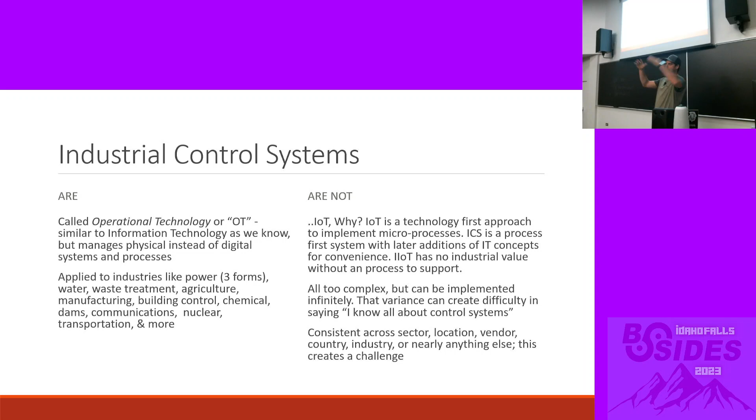Very general statement. We'll start high and then get into the weeds. Industrial control systems, they're all around us. They make the world work. We refer to them more often as OT. It's a combination of both IT and the actual physical systems to make these things work. Operational technology, in this instance, is systems and processes, the same way IT is made up of systems and processes to make all of our computers and networks and databases and the millions of other things they do work. OT is applied to something where the process and output is not virtual, but more so physical, and they have a physical aspect to them.

There's a bunch of industries that it works within. I won't list them all, but you can guess the stuff that makes our life comfortable and cush is run by these OT systems. But they're not IoT. Something I get asked actually more often than I think. IIoT, for anybody that's going to want to bring that up, is IoT applied to industrial control systems, but if you take the system, like the actual plant or process, out of that, they are just IoT, so I would not consider them on their own an industrial control system. They're kind of a control system, and they have some of the aspects we'll talk about today.

Additionally, control systems are complex. Why? Because across sectors, across vendors, across whether it's states, nations, your regulation, how they're made, what software they use, what hardware they use, the understanding of what your limitations are, your safety regulations, all these are different. And because of that, saying you want to secure them is also different.

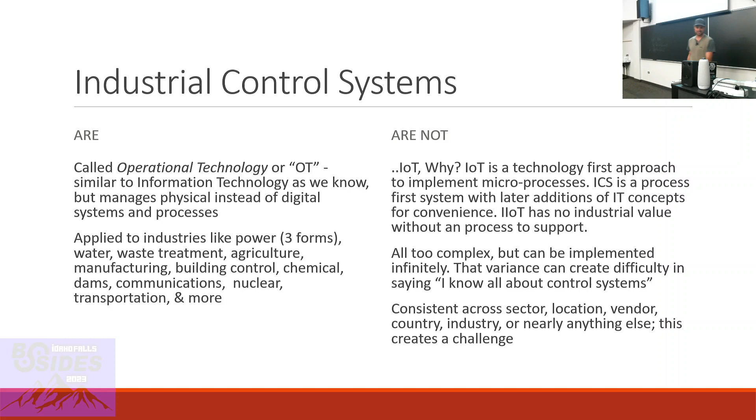I appreciate that. Yeah, inconsistent across sectors, locations, vendors, countries, industries, nearly anything else. This does create a challenge. Appreciate that.

So, this is the only time I'll be talking about hardware. A lot of people, when they talk about OT, they're like, oh, you have PLCs and HMIs. I'm not talking about that. We're going deeper, for better, for worse. But generally speaking, you kind of have a couple of classifications here. PLCs, most people have heard of these. Who has heard of PLCs? Many folks. Look at that. If I had said that like 8 years ago, I wouldn't have even raised my hand, let alone half the people in this room, maybe not. So it's becoming more common.

Realistically, our real-time computers and PLCs are kind of becoming one. They used to be a little bit more separate, but your average PLC put out by a vendor is running an RTOS now. So that's kind of becoming one. Microcontrollers, essentially very pared down computers. They do have a command shell, but they're very limited. They're faster than a PLC. By nature, they're very much pared down. If you want to get even faster, which we'll talk about like process time and loop time, you can go to an FPGA.

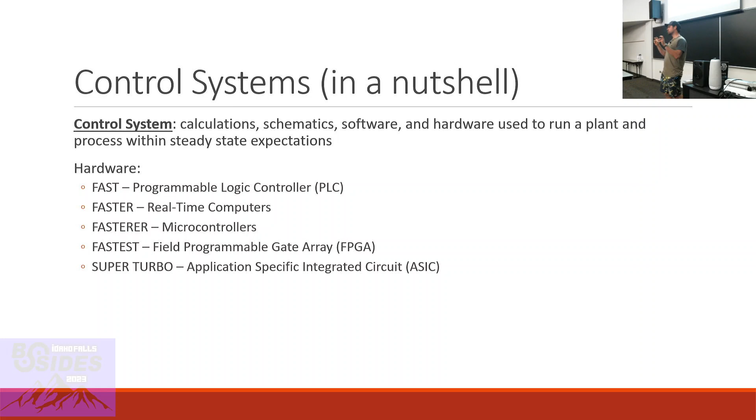It's essentially a piece of hardware that's customizable to have logic arrays, logic blocks, make decisions for you as you see fit. And based on what your input and output are hopefully going to be, you kind of get to choose how this chip reacts. And then the fastest, super turbo, I call it, is an ASIC. Anybody that's ever used like a voice recorder: it takes an analog signal and in nearly real time converts it through a digital codec, creates a digital file, streamlined in real time. That is a chip that is considered probably the fastest way to have a control system reaction. So that is the last of our hardware talk.

And now we'll actually talk a little bit more about control systems and how they're applied. So, classes of control. Most of what we'll talk about today is continuous. This is what most of us would understand as a control system. Continuous, generally speaking, you have infinite granular control over what we call a manipulable. You have a high point and a low point, but within that you have unlimited options of what you can actually adjust. Then you also have the opposite of that, the other most common, which we'll talk about: bang bang. This is essentially a binary output. You kind of have an on or an off.

The best way to compare these is if you use a stove and it is a gas stove, you have a knob, off to max. If you have a flame really small, you can adjust it perfectly to where you want it to get the right temperature. That is what I would call a continuous control. Whereas bang bang would be more of an electric stove. For anybody that doesn't know how electric stoves work, they essentially turn on until they hit what you want them to be, and then they either switch to a smaller coil or they just turn off and then come back on a minute later to retain what they can of that temperature, right?

So we'll go a little bit more into detail on that, but two that I figured were worth mentioning are model predictive. So this is used, I'd say, mostly in modeling and scientific purposes, I'd say not in a physical realm. This is essentially saying I want to build a control system. I want to do the math to calculate what will happen. I want to have inputs, outputs, essentially writing a computer program, but doing some form of simulation to see if I can prove my control system will react how I wish.

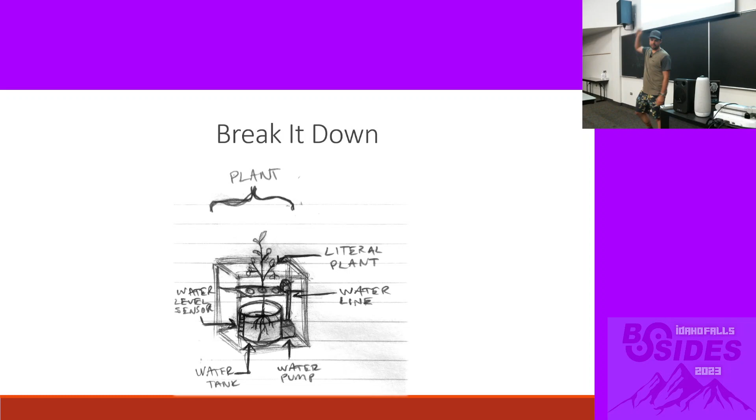So this is our plant. Literally there's a plant, but also we'll figure that we actually call this a plant. So this will kind of be my reference point. This is by far the most simple version of what I could consider a control system, if not like a light switch, but what we would kind of formally refer to as a control system. I'll come back and reference this a bit.

So in this, we have a water level sensor, a water pump, a water tank, there's a little plant. It's a hydroponic system, so it's growing. The roots have overgrown into the water, neither here nor there. And then there's a little water line that pushes water up into a watering tray. Very, very simple, right? But the plant itself is a physical space in which your processes can function.

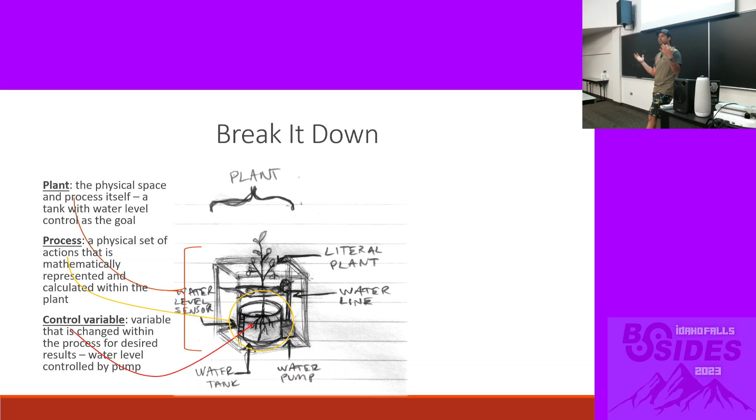Some plants have one process. Most plants have dozens of processes within one plant. But the plant is a physical space, whereas processes are, I'd say, virtual, if not a mathematically representable thing going on. So a control system has many processes, many plants with processes within them, one-to-many relationship. In this case, every process should have a control variable. In our instance, what I'll refer back to is the water level of this tank. We'll say that it is at 4 inches. It's measured at 4 inches, and we want it to be at 3 inches. We'll go a little bit deeper into that.

Every process, at least if we're using something that is a closed loop, which we'll talk more about, will have a feedback option. In this case, that is provided by our water level sensor. It can tell us where we're at, so we understand where the status of our process is as an output, used for modulation. We have a reference, which in our case, we also refer to as a set point, but it is what we wish our actual control variable was at. Like I said, we wish it was at 3, we want it at 3 for some reason.

Usually your reference is provided by scientists, subject matter experts, engineers, people who understand their topic very well. If you're working in a plant where you're mixing chemicals, you probably have a chem engineer, and they're going to say, well, you should have exactly this amount parts per million mixed at this rate with this temperature, many things going on, and they can tell you why. But as a process engineer, your job is to get to that actual reference point, because the people who know what it means told you to.

And then finally, a manipulable. So a manipulable is the actual physical thing we can put power into or take power away from to control what's actually happening and potentially modify. Again, get our control variable as close to reference as possible. In this case, it's a water pump. So very, very simple system. For what it's worth, any industrial control systems you might be imagining are this times, we'll say, anything from 10 to 100 as far as complexity. So we only have one thing to control here.

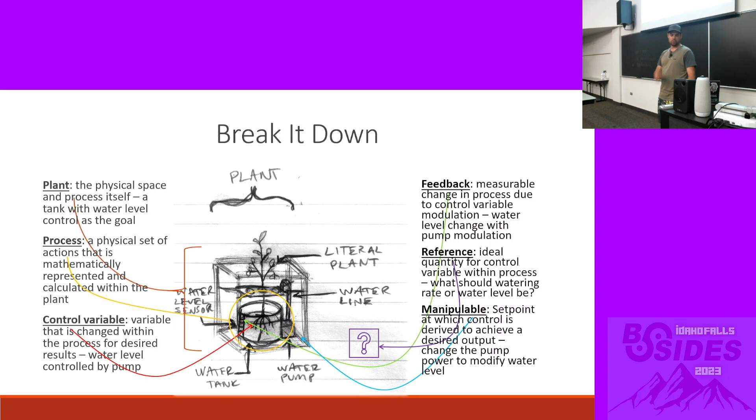But I mentioned set points, and I mentioned that there are larger control systems in the world, so I'll give you a couple examples just to give a reference of how this would apply in the real world. So you can imagine power transmission. In this case, we'll say line voltage would matter.

So if you had power going through a line and a squirrel touched it incorrectly, or it touched a tree, or something fell on it, and you're measuring through feedback what your line voltage is and it goes to 0, the smart thing to do would be to open a relay somewhere, cut power to that line, protect from a fire or an arcing or something like that for the safety of your system and also the safety of anybody in proximity to that system.

Water treatment. This is something that anybody that's been following cybersecurity for industrial control systems in the last couple of years would know. Oldsmar had an incident where chemicals, parts per million, were being modified in the plant illicitly. You don't want to have too much or too little of any given particulates in your water, right?

That's how I work. Oh, I lost one. That's good. So this is supposed to say oil and natural gas on the left. Thank you, PowerPoint. Appreciate that.

Making sure your O&G, your fluid, can actually flow as necessary.

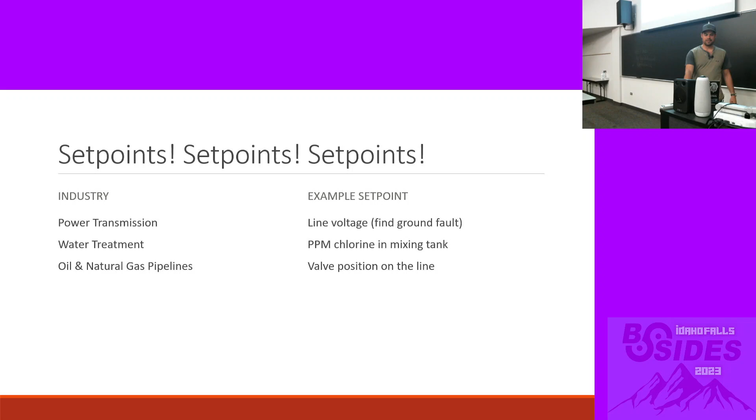Thank you, Microsoft. Medical: anybody that has or knows somebody with a diabetic condition, if you have an insulin monitor, it's quite important to monitor your blood sugar level and have something, an insulin pump, modifying your blood sugar level accordingly. And then building control, the fact that this room is at a comfortable position.

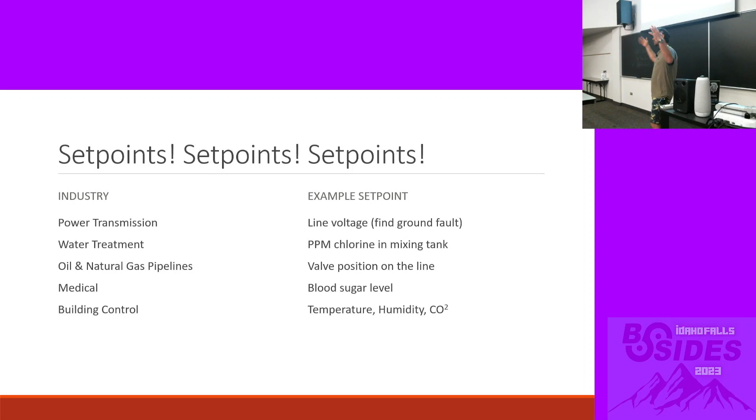I don't know if you guys are too warm or too cold, but we're looking at the temperature, adjusting accordingly so we're not freezing or sweating. In industrial instances, you might be worried about what your humidity is, what your CO2 levels are. In a home, you probably care about that as well. But there you go. That's a couple examples.

And I will take a second because I've been ranting while I drink water. Does anybody have questions? Yes. That means I'm explaining so perfectly that nobody has anything left. Oh, I'm sorry. My apologies.

That's a great question. I would say it's up to, are you building your own process or are you building for somebody else? I'll answer your question with a question. Because if you're at home, say you want to build something to feed your cat. How much should your cat eat every day? You can measure the weight of the bowl.

And you say it should have 5 ounces of food at 6 a.m. every morning. And you take whatever the current weight is, minus 5 ounces, invert it, and then pretty much dump food until, depending on how you apply it, right? There are practical, obvious times where sure, this is what my set point should be. But realistically, it does take a bit of a team.

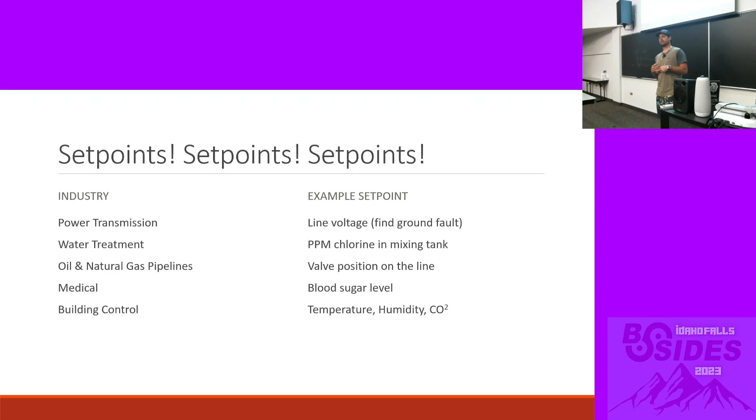You have to have one of those smart people that can tell you, well, my line voltage should never exceed this many kilovolts. Or if we're trying to do load balancing, realistically, power engineering is all about balancing. It's a nightmare. So it's never actually at ideal. But you might have to have an environmental engineer to understand, and we'll talk about this a little bit when we get to noise and disturbances.

Yeah, so it's all about the complexity of your system. If you want to build something at home, congratulations, you're a subject matter expert. If you're trying to get something a little bit more complex, you're gonna have to call a couple friends and perhaps do some homework, get somebody who knows differential equations on your side, because that's just the way it goes with tuning and whatnot.

I appreciate your question. Any other questions? I apologize for missing your hand.

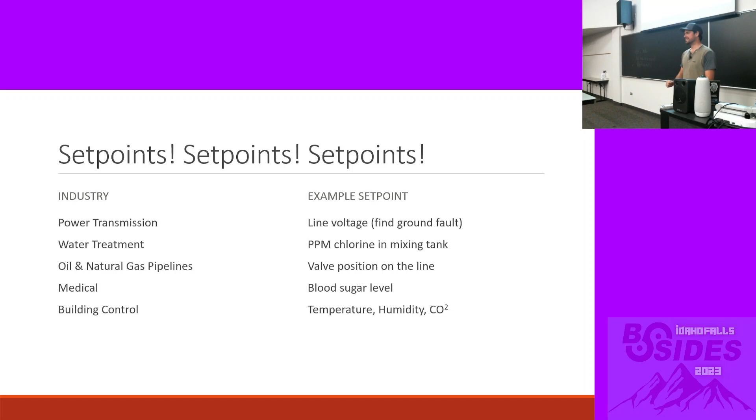Cool. All right, basics were basic. We've made it this far. We'll go to a couple more advanced applications. Not advanced, but how do you actually use this, right? What does it matter? Because we've talked about something super simple. We'll talk about loops. We'll talk about feedback and feed forward. We'll also cover 3 things that make those first 2 necessary, and then PID tuning. So these are the, after understanding the basic terms.

Disturbances, as we just said we cover. Disturbances are inherent, we'll say, principles or facts about your process that you don't necessarily get to control, but you can observe. If not, you are putting in control to get around your disturbances. So, for the purpose of our example here, the water might pump up to your tray there, but it can't really control how quickly it pumps down.

Or if we're doing an array of pumps, and they're pushing into each other, you can say maybe, well, I can control the rate at which water leaves my tank here and goes to the next one, but I can't control how quickly it's coming in, or if water is sloshing, evaporating, something like that. There are instances of things that will modify what you want to happen, and you're doing your best to work against them. Noise, on the other hand, is inevitable, and you kind of just have to work around it.

So noise is introduced by, realistically, poor sensors. So I built this system. It was a little different. I just had to draw something real quick, and that just worked. But I built this system. That is an Adafruit sensor. It costs a whopping $10. If I went down to the water company and said, I will measure your water level, let me get my $10 sensor out, they would laugh at me, and I would laugh at me because I sound silly, right?

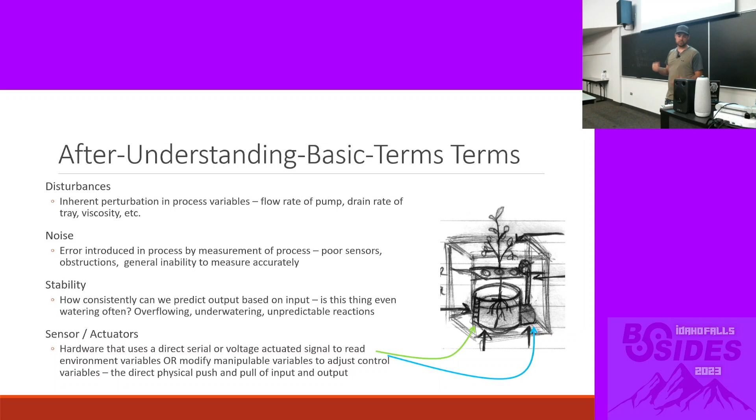And then your sensors and your actuators, these are another fancy way of saying the inputs and outputs. So what can measure how you're doing what you're doing, and what can help you change what is going on to get better, or to further reduce your error, which we'll get to in a second.

Sweet deal. So now we get to discuss loops, arguably the thing that makes control systems work. Both of these are used equally. I would say, if you want, we can talk a little bit about when you would implement each, but open loops are more simple, so we'll start with those. Anybody that codes, again, this is going to be pretty rudimentary, but the logic there is underlying. So an open loop removes much of the nuance of how you control a system. There is no feedback in an open loop. Generally speaking, it is a force control, so you kind of set an input, and then it just goes into perpetuity until something interrupts it.

So pretty straightforward. There are instances where this is nice, like an override or a safety control. Instances where this would make no sense, like on something where I have to know how much water is in it. But the output is independent of the input, lacks reference to it, pretty self-explanatory. Reference input goes to controller, actuating input. There's no loop in this at all. It's a straight line, right?

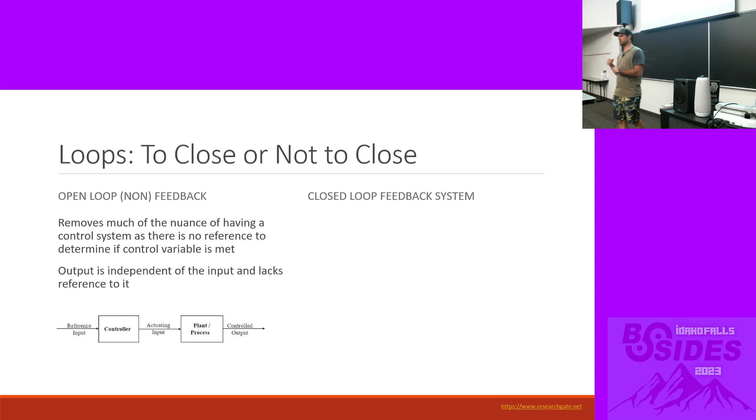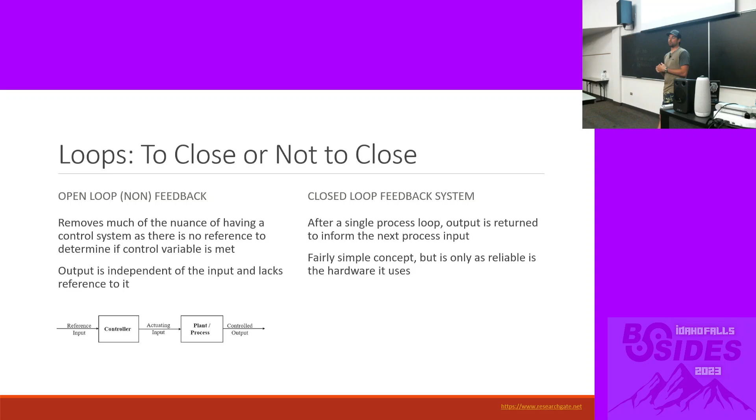So an example of this is a light switch. Turn a light switch on. It doesn't know if the light's on. It just changes state. Maybe it's getting power, but the light switch doesn't know if there's light coming from the actual bulb. On the other hand, a closed loop feedback system has something to measure and provide feedback. So after a single process loop, output is returned via a sensor, and it informs the next process input. And we'll talk a lot about closed loop much more today than open loop.

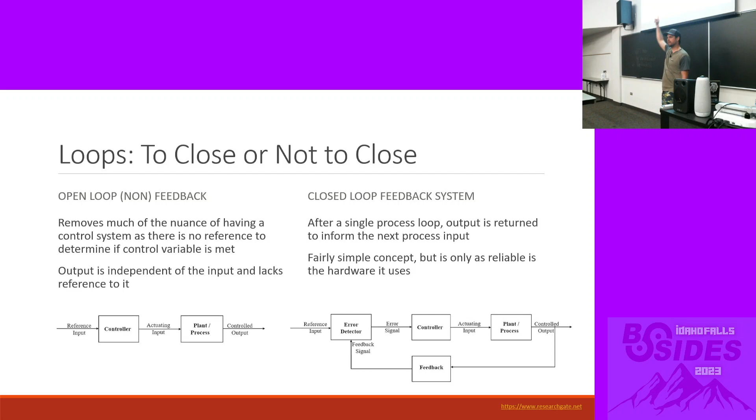And this just runs into perpetuity with the input and the output changing as we go. So, as promised, we'll talk about this a little bit and apply some of the terms that we learned to it. At this point, your reference input, that is what we call the control variable. So this is what we want things to be at. This is our set point. This is me saying, I would like my water to be at 3 inches, please, process system. And this is what I've embedded in my logic to say the feedback hopefully should be at 3.

However, I don't always get that, right? So error is a measurement. It's the difference between your reality, my water is at 4, that is actually in the far right, your output, but we're going to assume for this instance we've already done one loop and I have the feedback saying water level's at 4, what do you want to do about it? I wish it was at 3, so our error is 1. Pretty straightforward. The goal in all processes is to get error to 0. Pretty simple, but sometimes the world gets in the way and there's lots of noise in there.

The actuator is our controller, pretty straightforward. It's also tied to the manipulable. Since they're considered the same thing, we're going to say those are tied logically. And then our control variable output, kind of alluded to this earlier. So this is where we're saying we've measured it at 4. We wish it were at 3 because it's not. We've turned on our actuator via the controller.

Controller essentially, in this case, is me closing a relay that gives power to the pump. If you're writing this in code, like while error not equal to 0, you have to figure out if it's positive or negative. Then you would say close this loop, essentially turning the pump on, pump water until error is 0. And then the sensor reads that and pretty much says, cool, so now we're at 3.7. We've gone down 0.3 inches.

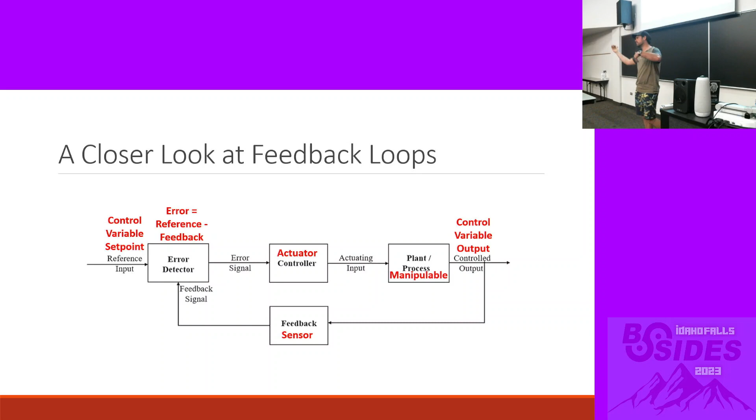Gives that back to our error detection. And so now our error is 0.7 instead of 1. And it does that a couple dozen times a second until it can get from 4 to 3, and our error goes from 1 to 0. So, like I said, fairly simple concept, but these are just putting all the fancy terms on it that would apply to control systems or process engineering.

So, now we'll discuss feedback. Instead of using bullet points or graphs, I'll just tell a story with this one for the sake of getting the concept across. Imagine you're on your way home from vacation and you arrive home. It's been snowing for a week. Well, we all live in the area we live in, so I imagine we all understand this.

And you walk in the house and you say, "Whew, it's cold." And you run over to the thermostat, turn it on, and about an hour is what it takes for your home to warm up, and you go, "Thank you. I can take the 5 jackets and the 3 pairs of socks off and enjoy a cup of cocoa. Good for me." If I had to say you're using feedback, does that kind of make sense? You come to a place, you measure too cold, you turn on a heater until it's not too cold. Pretty straightforward logic.

How would you go about solving this issue better, right? If our reaction time is an hour, kind of not great. So we'll flip it and say you're driving home, you're about an hour from the house, and you say, "Well, it's been snowing all week, and I'm pretty sure the house is too cold." So you log into whatever your smart thermostat app is. Hopefully you have that on a guest network or something that is not on the rest of your LAN. Security people, please implement security in your network.

And you say, "Cool, turn on the heater because I don't want to come home to a cold house." And then your thermostat plugs away, you get home, and you're like, "Oh, look at this, my house is nice and toasty. I don't have to wear 3 jackets. I don't have to have 3 pairs of socks on. Get to enjoy my cocoa and read a book." This is what we would call feed forward.

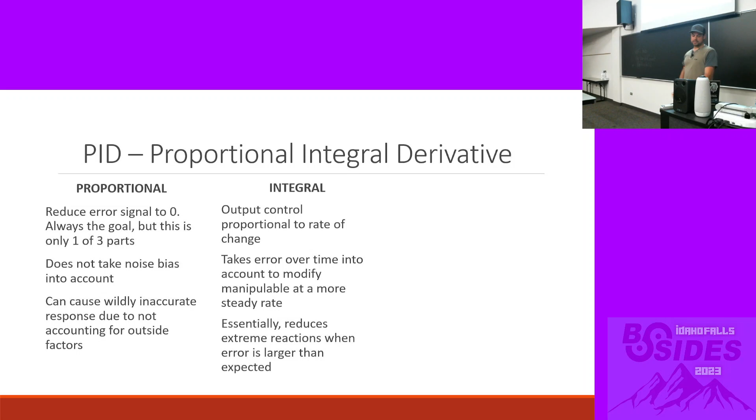Derivative. Anybody here that likes doing lots of math, this is a double derivative. You're not only taking error, binning it, then looking at it over time, averaging your time response; it compares your errors from time step to time step, and almost uses that as a prediction to go against significant actions, or rather only make significant actions when there is a notable change.

Trying to think, yeah, I figure that's worded pretty well. D prevents correction, overcorrection over time after P and I have been established, and it's acceleration and deceleration control. So it's a bit more predictive. For instance, if I have a pump that is pumping too heavily, it'll kind of take that into account and say, I know the sensor's reading that it's going to go pretty erratic, but we can already correct for what your output is based on knowing how your actuator has been behaving and what the sensor is reading based on that. So that was the best job I could do at PID.

The fun thing about this is that in itself it is tunable, so you can add weights to each of these letters and say, well, in this process, I'm getting a better response when I'm putting a higher weight on the I in this instance and not so much on the D. Or, like I said, some folks won't even do the derivative, and they'll just use PI tuning. Or you do lots of proportional because you have a killer sensor and nothing ever is measured incorrectly, but then the integral is just there for kind of smoothing it out.

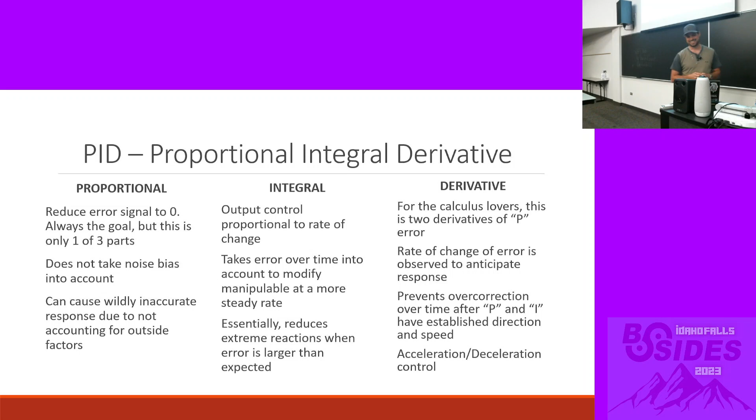You got a question as well? Okay. It's fair. Yes, that is. You better trademark that. Awesome. So now I'm just going to go quick conclusion. I'm only 5 minutes too fast here.

But what we learned: we talked about hardware options, basic terms of process control or process engineering. We applied those terms to a very simple system, a hydroponic system that only has one thing going on, and even then it's kind of poorly designed. Discussed examples of these being implemented in different plants across different industries, expanded on those examples using the loops, feed-forward, feedback, and talking about noise disturbance. And then we touched on PID, which hopefully I actually described in a way that was useful.